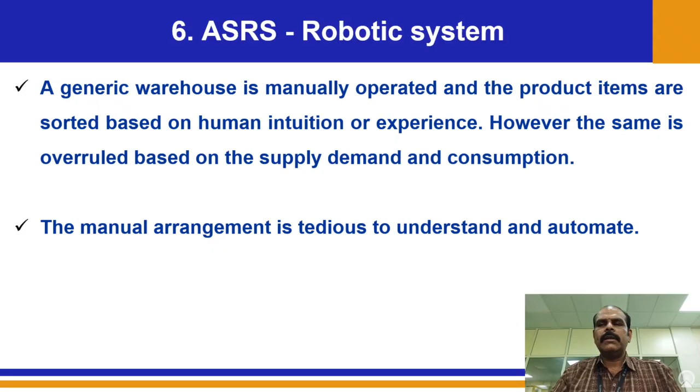Second, when you want to automate, there should definitely be some sort of scientific guideline in place. This is another reason for such difficulties. Now we'll see how to go ahead and solve this particular problem.

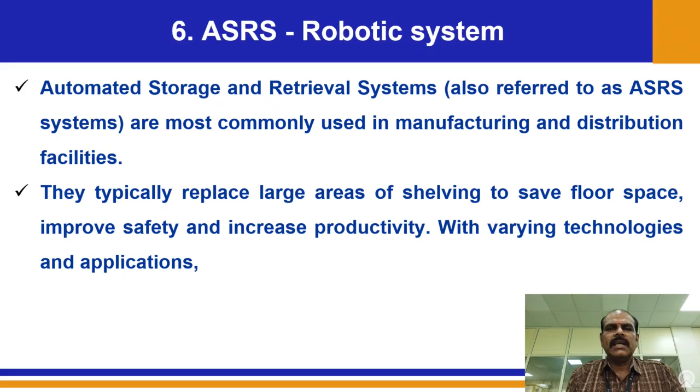Basically, we use ASRS for effectively, efficiently and securely storing items. Not only to store items, but we want to compactly arrange everything, not haphazardly. It has to be properly arranged. What it does is allow the user to easily and quickly retrieve items whenever needed, not only for picking and packing, but any case where you want a tool, we go ahead like that.

There are a good amount of companies involved in this ASRS manufacturing activity. They build self-contained GTP, that is Goods to Person Automated Storage and Retrieval System. There are a good number of companies involved in this particular business.

These technologies handle different volumes. They are not confined only to some numbers. Theoretically speaking, they are very good at handling different volumes, types and velocities of non-palletized inventory at variable speeds to accommodate varying throughput demands.

Now the term we are coming across is non-palletized inventory. Palletized and non-palletized inventory is an interesting topic we'll discuss in some other units, if I'm not wrong unit 4, where we talk about packing. So palletizing means stacking one over the other - one carton or box, above which we have another, and we can stack a good number likewise.

Non-palletized means they are not in a properly packed condition. Though they may be packed, they will not have all sorts of similarities - not the same shape or size, and we can't assure we'll always have products in packed condition. So we might have difficulties in this regard. The ASRS system is highly capable of handling such non-palletized inventory, without proper packing or with different packings and sizes. Either way - with packing, without packing, or irrespective of sizes - ASRS is capable of handling it.

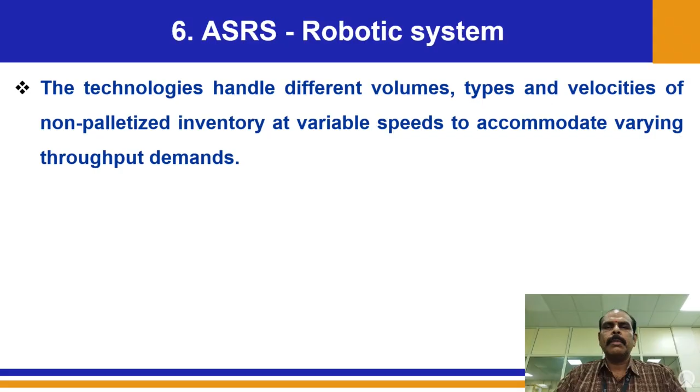So what are the other names? We should know the other names for ASRS. Automated Storage and Retrieval System is the actual abbreviation. It is also called dynamic storage systems, high density storage and retrieval systems, and goods-to-person picking technology - GTP picking technology. So these are the different names by which ASRS is also known.

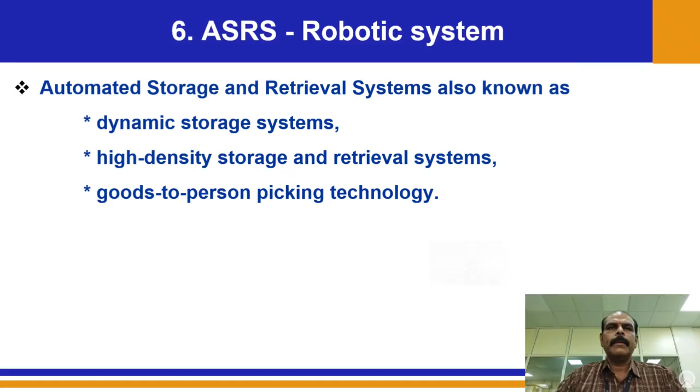Now we'll get into the objectives of ASRS. First, it should utilize the space - that is the foremost important thing. Whether palletizing or non-palletized inventory, we are still supposed to utilize the space; this should not be an obstacle for space utilization. That is number 1: maximizing storage density, using vertical high density storage layouts for optimal use of warehouse space.

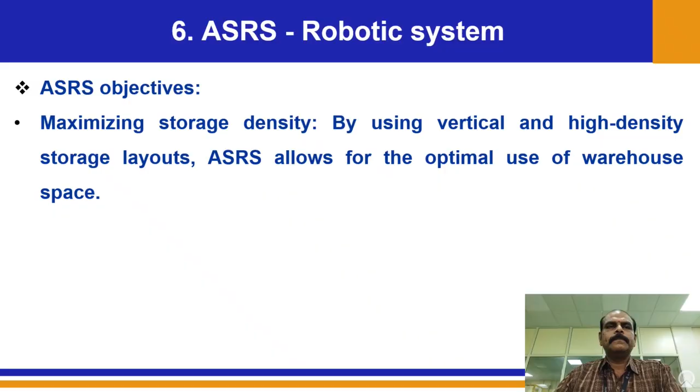The next objective is increasing operational efficiency. As the main principle of automation goes, automation reduces the time required for storage and retrieval, speeding up order fulfillment. So these are all the objectives.

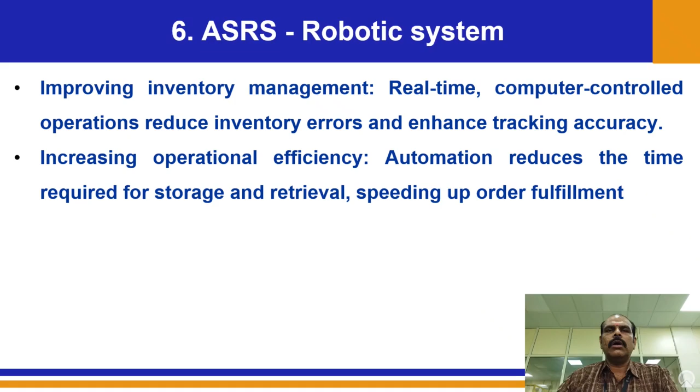Coming to the secondary objectives, that is advantages: reducing labor cost, since the need for manual over-exertion is one of the challenging parts in a warehouse where work beyond one's lifting ability is minimized on a greater scale. Enhancing safety - ASRS minimizes human movement in potentially hazardous environments, enhancing safety in those cases.

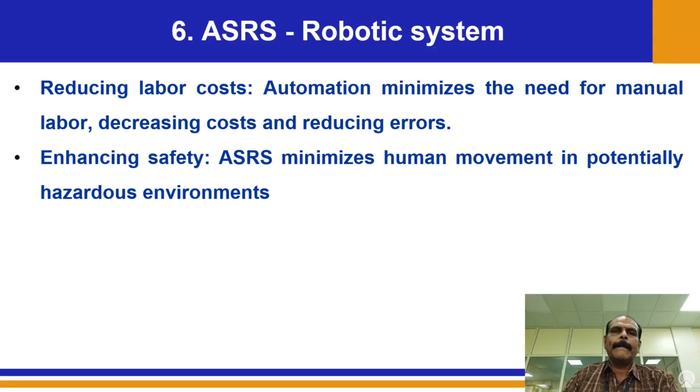Supporting just-in-time concepts - within the least possible time when you want the product to be picked and packed. When you want to go ahead with JIT activities, ASRS ensures 100% support with respect to production scheduling and material flow.

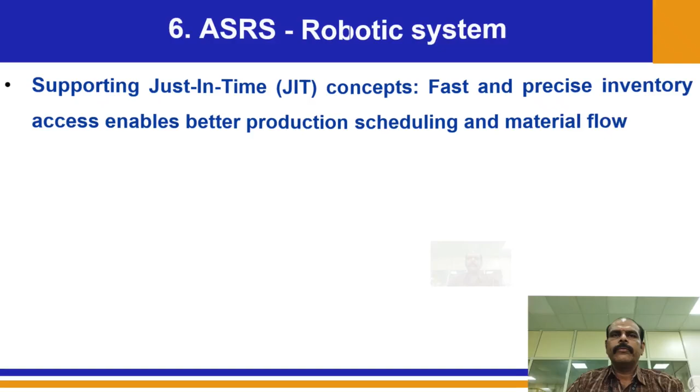Key components. Now we'll see. So we just discussed what is ASRS, then the next discussion was with respect to the advantages and benefits we can potentially gain out of ASRS. Now we'll see what all are the key components.

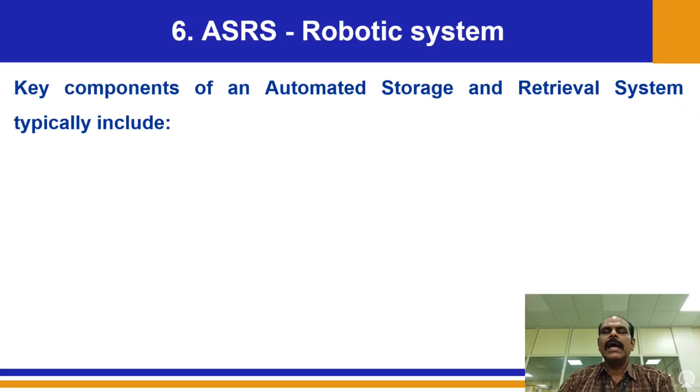So these all are the key components available in ASRS. First is storage structure. We should have a structure that is going to act as housing, accommodating all the tools or products we go ahead with. Usually it might be a rack, shelves, customized pallets and bins. Directly we can accommodate pallets, bins, or cases, or even carousels and trays.

Then retrieval mechanism. So there are racks or shelves, and each one will be designated with some identification mechanism. Say there are 10 racks. We should have a retrieval mechanism: you go to the controller and call one particular rack, say rack number 10, so that it should rotate or revolve or have some movement, so that automatically whatever rack we called for comes to one particular position, where we can take the things out. That is the retrieval mechanism.

So first is the entire structure, a skeleton, and second is retrieval mechanism. The third is input and output stations. Obviously you have got a rack. Loading and unloading should not be in the same space. The reason is efficiency - input should be different and output should be different, so that we can plan properly.

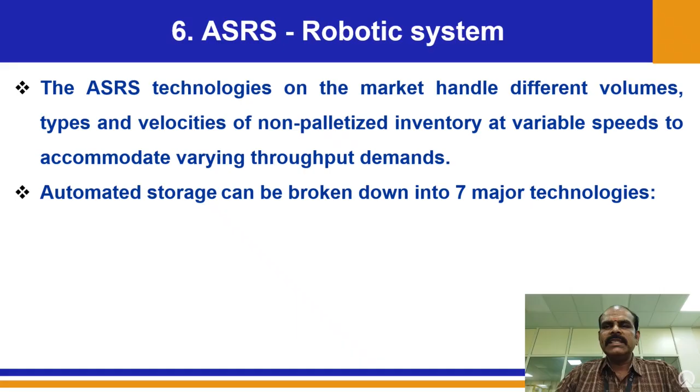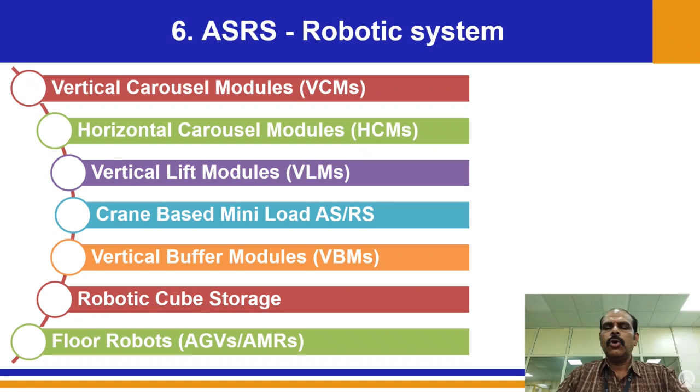The first is going to be vertical carousel modules, VCMs. Second, horizontal carousel modules, HCMs; vertical lift modules, VLMs; crane based mini load ASRS; vertical buffer modules; robotic cube based; and the last, floor based AGVs or AMR based. So these are all the 7 different types we have. Now we'll discuss everything in detail.

So first, vertical carousel. The term vertical comes from the arrangement of the structures - we have the structure and that structure is going to be in the vertical case. There are going to be 2 pillars. We can have shelves or racks however we want, and we can provide a delivery mechanism and that is going to work.

Here, what is the advantage is also going to be the disadvantage. In one direction it obeys gravity - from top to bottom when it comes, gravitational pull is there, so that takes care of unloading faster. On the contrary, when you want to go against gravity, defy gravity, that is a disadvantage while loading. So this is the easiest way, and this is the most commonly found ASRS system. VCM module is found in almost all complicated applications.

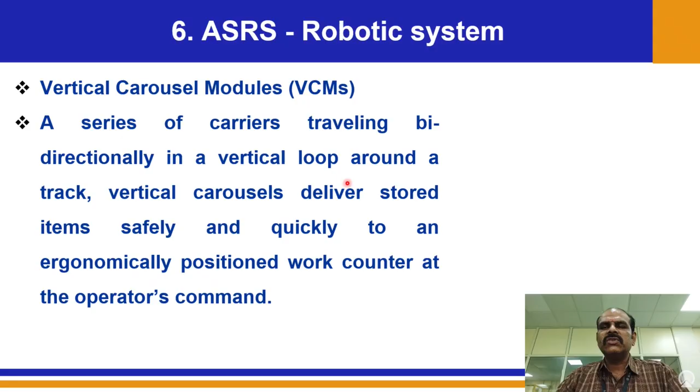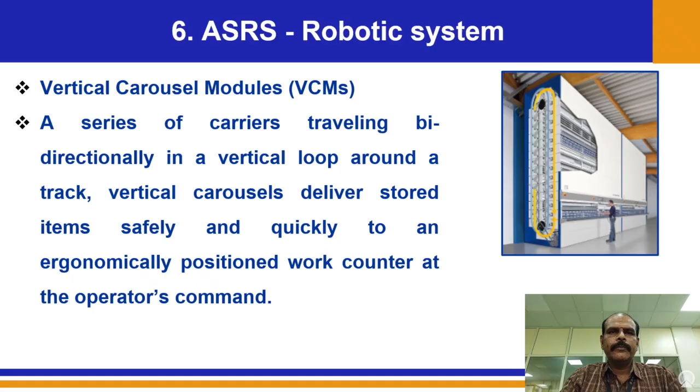Horizontal carousel. Again, based on the earlier orientation - in the former case we saw it was vertical, but now it is going to be horizontal. Highly dense storage bins mounted on an oval track which rotates horizontally. Earlier it was vertical like this, now it is going to be horizontal.

Upon understanding the orientation itself, we can come out with one outcome: horizontal means we can load heavier, bulkier components, because the load is not going to be borne by the structures on either end. In the case of horizontal, everything is mounted on the floor, so therefore the load is going to be borne by the ground surface. This is how the structure is.

Likewise it can go in an oval shape or elliptical shape, even circular - well and good. But why not go circular? Inside the circle you are going to waste space, so therefore oblong is always found to be the best.

Same ergonomic window concept, everything is there, but the only drawback is volumetric utilization has to be thought of. Space-wise it is okay, but we may not be able to stack very high, because a human should climb in order to take the product out. So that might be one particular area where we can improve.

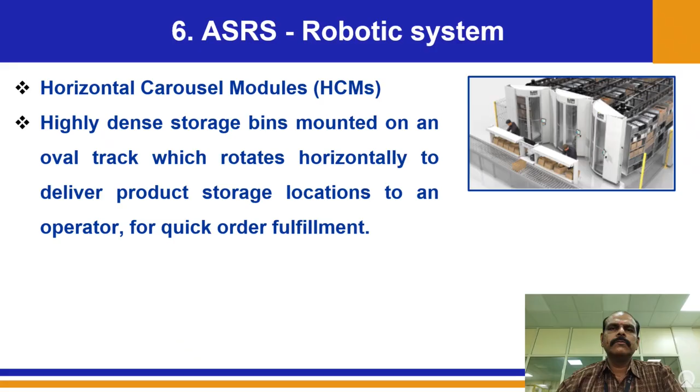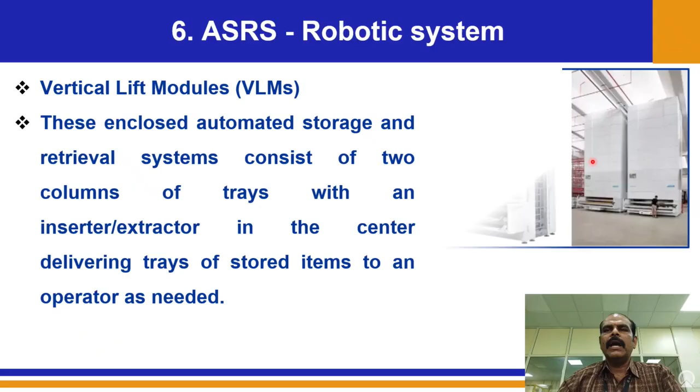Next, vertical lift. The first case was vertical, and this is also vertical. But here, we'll have a lift mechanism that moves from one point to another in a staggered case - that is the advantage. Earlier it was continuous, but here, only in one direction it goes and in the other direction it comes, the way a lift operates in an apartment building.

There are some 4 floors. This lift goes from ground floor, 1, 2, 3, 4, and again comes back like this. So there is no continuous rotation, only reciprocating - it goes to the top, comes down, top, down, likewise. But in the first case, the vertical carousel, it completely goes like a giant wheel. Here it is not going to be so - it is just lifting up and down. That is the difference.

Here, the same advantages as the VCM concept are reserved. But the only thing is, here it is not going to completely make a rotation. So here we are utilizing gravity as well as defying gravity. That part is going to be little bit interesting.

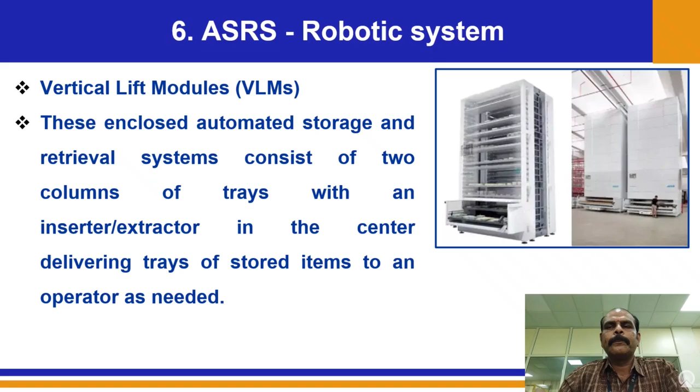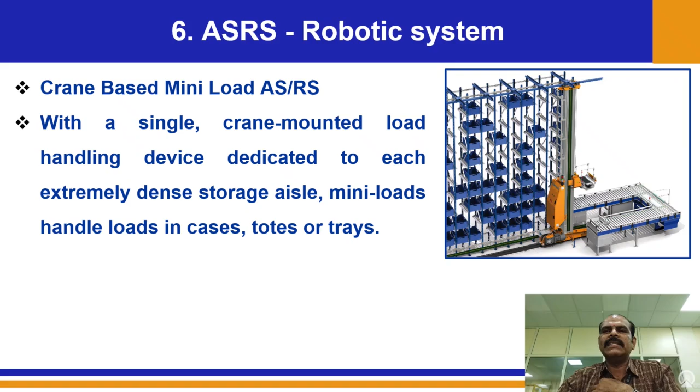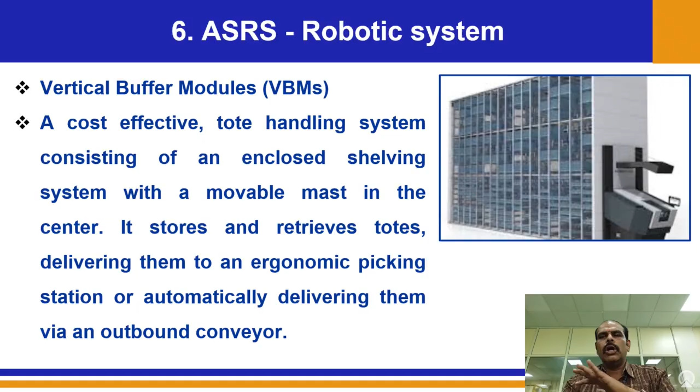Tote shuttles, as we saw earlier, have 2 entries and 2 exits. It moves very fast and brings the product out. It will be completely confined, 100% confined. The product is pushed from that particular position and the tote shuttle goes and lifts the product, bringing it to the end user. So the ergonomic window is maintained, but in between, the product is brought by the tote shuttles.

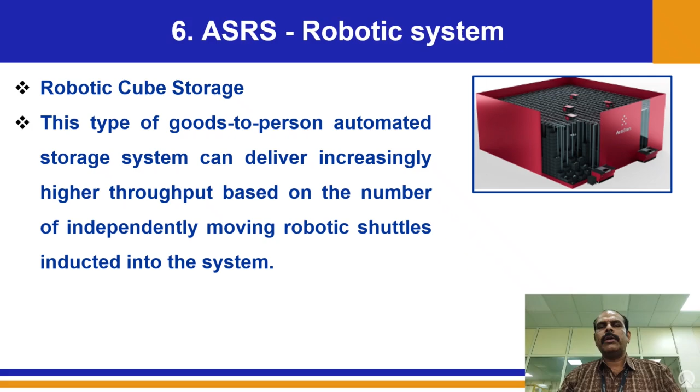It's a GTP concept, but the thing is, from the bulkier cube storage, robots are going to pick and place the product in the ergonomic window. These things are quite hi-fi, and while they haven't found their place in common industrial use yet, these are evolving techniques.

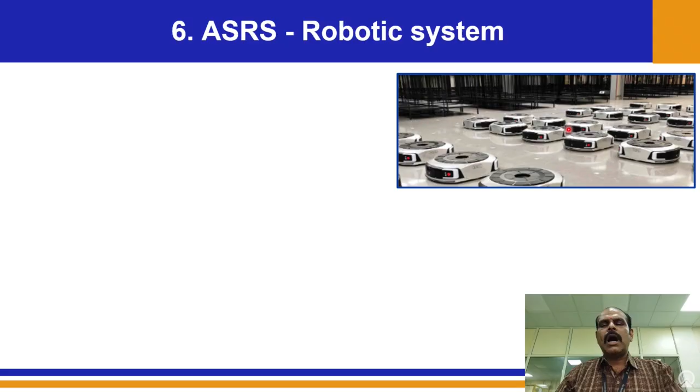Next, swarm of robots, multi robots. Floor robots will be used, usually of the AMR category. AGV means it's going to be more complicated, but AGV can still be used in cases where investment is going to be a tough task, AGVs are preferred.

AMRs are preferred when this moves to one particular point inside the racks and picks the product out. Usually they are called a fleet of smart robots. This floor robot goes to the point, picks the product, and then they come out.

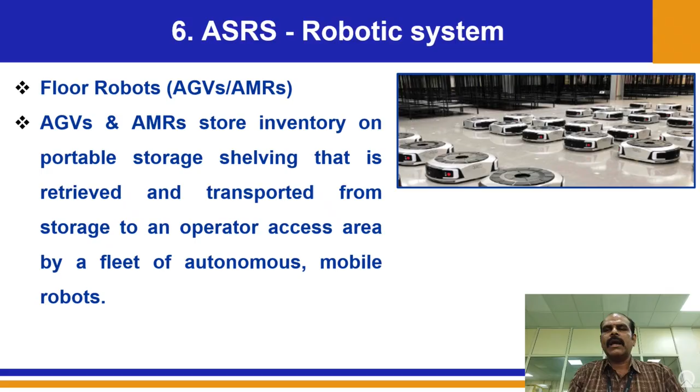So before we close this down, to summarize, we've covered different automatic mechanisms in which ASRS is one particular category that helps us retrieve as well as pick or place the component in the least possible time. Based on the configuration, we saw the different types of mechanisms to do this ASRS task. With this, we finish this chapter.